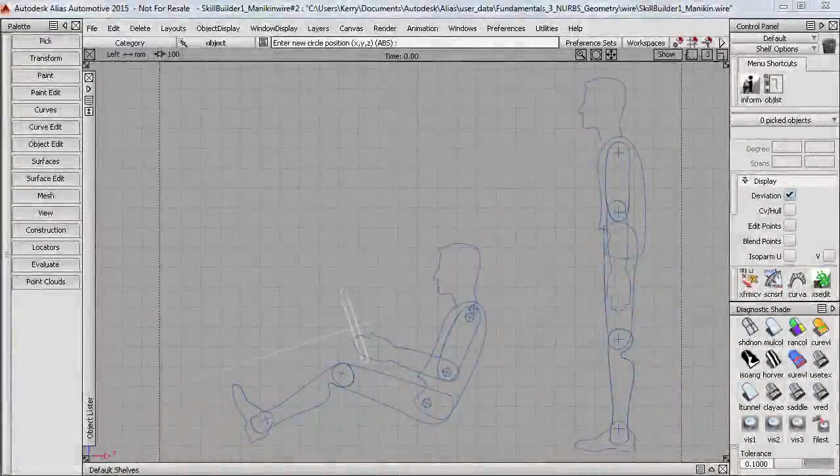This Skill Builder project gets you to create a basic mannequin model from multi-span curves, which can then be posed to help in future design projects. And I've just given you this sketch of the final assembly, and then also these reference parts, which are just on a layer which I've got set to reference, which means I can snap to the reference curves if I want to.

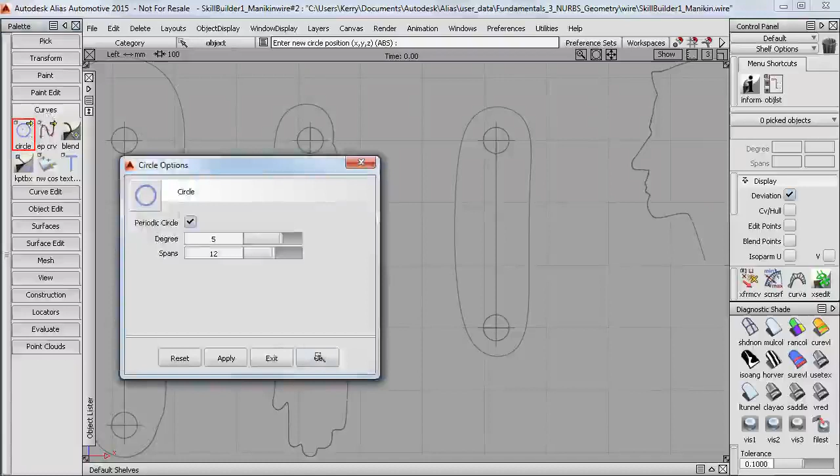Now I'll start with this upper arm, and I'll use a circle, and I'll keep it as a periodic circle. And then I can just scale it roughly to size, and then pick CVs and start to move them. And you can see the benefit of the periodic circle, which stays closed and smooth as I sculpt the CVs. Now I can always change the number of CVs in the control panel by changing the number of spans. And you often find that you need fewer CVs than you think to achieve a shape.

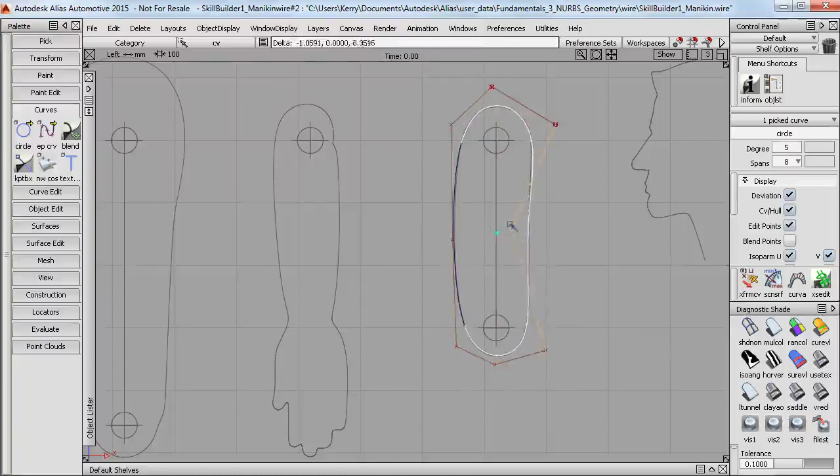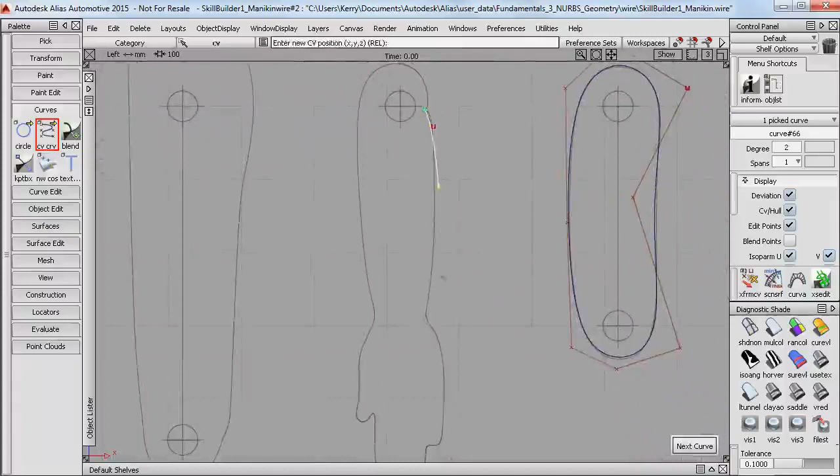Now, over here on the lower arm, there's a sharp point. And there's also a lot of intricate shapes. So for this, I'm going to use a CV creation curve. And I'm going to set it to degree 3, as this will help to hold the fine detail. And then I'll start at the sharp point and approximately trace around the shape. And as I'm doing this, I'm thinking more about the distribution of the CVs than I am about the exact position. And I'm trying to get more in the tight curves and fewer in the gentler curves.

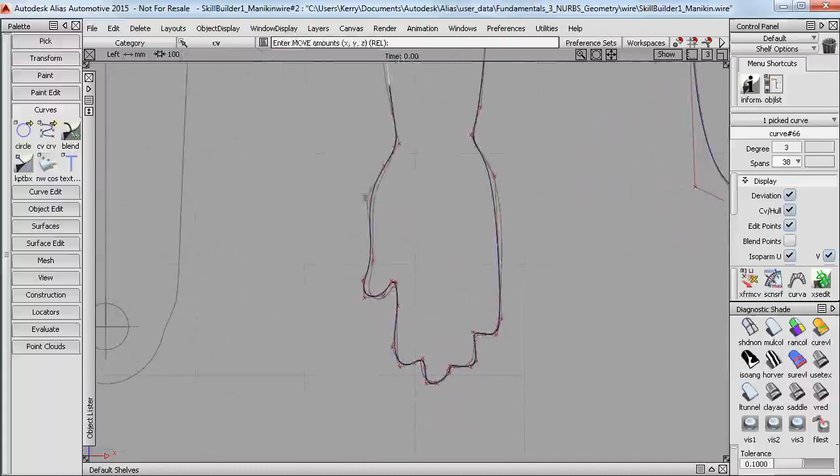Because all I can do at the start is just guess the CV positions as I place them, and then go back and start to move them around until I get the shape I want. And you do get better at guessing with experience, but it's still always a process of discovery and refinement. So don't be surprised if it takes a while to get the right shape.

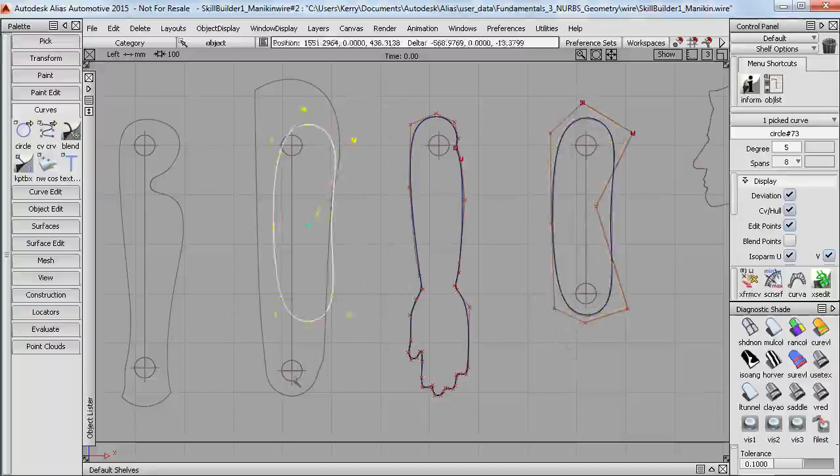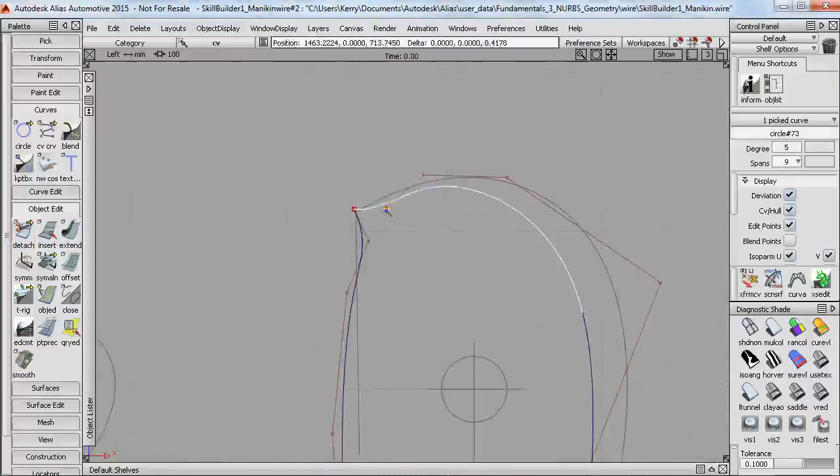Now for this large thigh shape, I can copy and paste the upper arm, move it over here, and then scale it roughly to size. But I've got a sharp point here too, and I can't create this from the periodic circle. So instead I can use the Detach tool under Object Edit, and then split the circle so that it becomes an open curve. And then I can just pick the CVs and create the sharp corner. And if I find that now I have too many CVs, I can just pick them and hit delete to remove them.

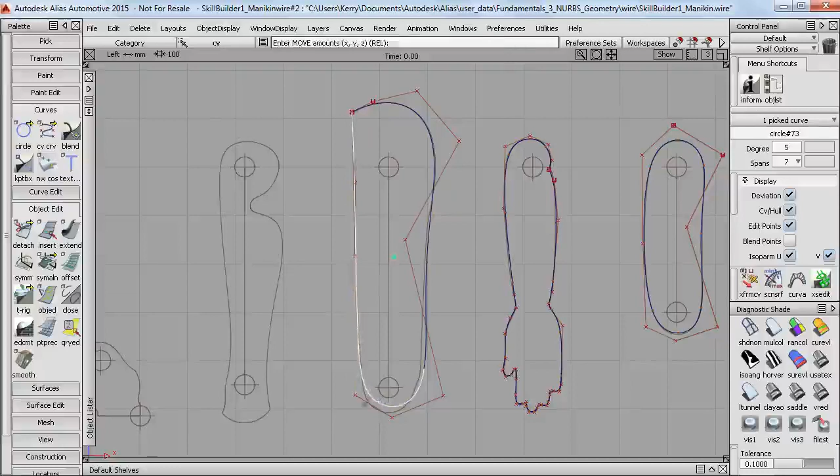So then I can continue to try and find the right shape. And the distribution of CVs is often just as important as the positioning. So I can bring these down to the bottom here to give me more control where there's a tighter curve. But I don't have enough CVs to create this small indent here. So to create extra CVs locally, I can use the Insert tool on Object Edit. And this adds in an extra edit point, which gives an extra CV too, and you can see the preview here in green.

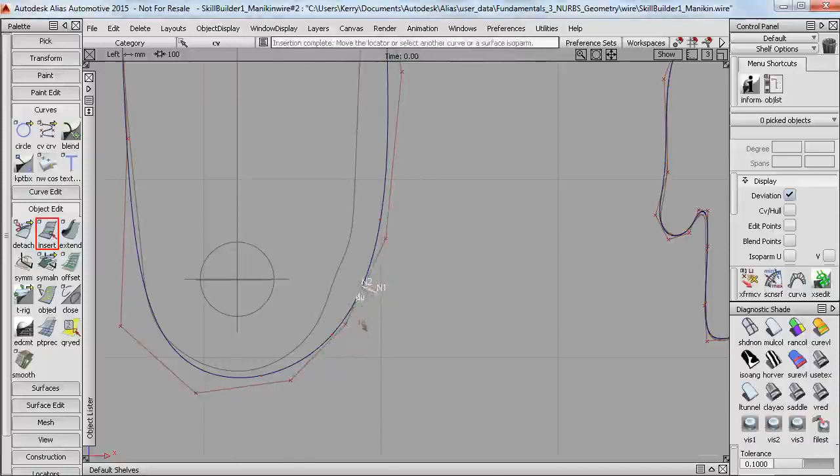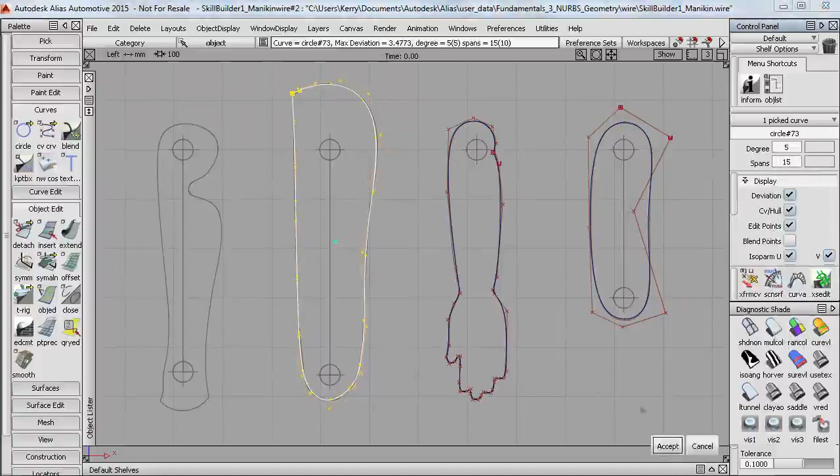So I'll hit Go, and I'll actually do Insert a couple more times as well. So that now I have extra CVs that I can use to create the indent. And you can see that the curve is a little bit lumpier now. And using Insert on these mannequin shapes is fine, but for our main car surfaces we try to avoid it, and instead increase the number of CVs using the Control Panel. And on the drop-down menu you can go up to 9 spans, but if you need more than that, just type in the number. So I'll stop here, but you can continue to finish off all the other components.

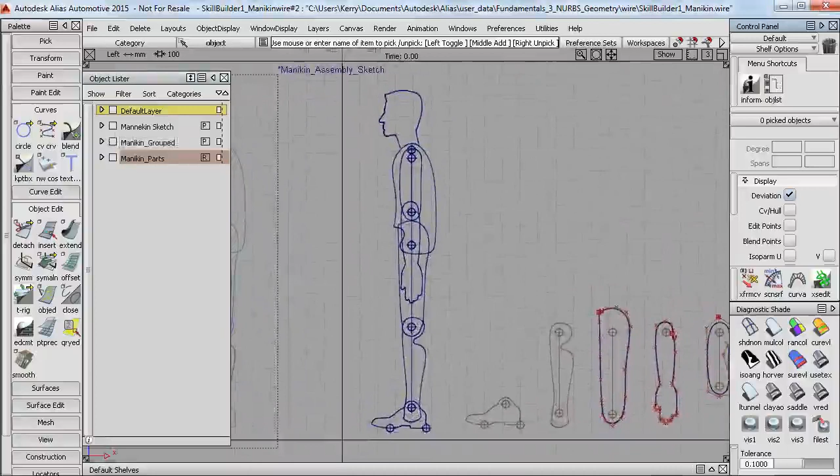So next, if you want, these can then be grouped and named and put together using the object lister. And I've provided an example for you here to show you what you're aiming for. So I'll just hide the other items and I'll turn off this layer. And if I open up the mannequin layer, you can see that the grouped mannequin contains the upper body and the leg. And these in turn have groups within them.

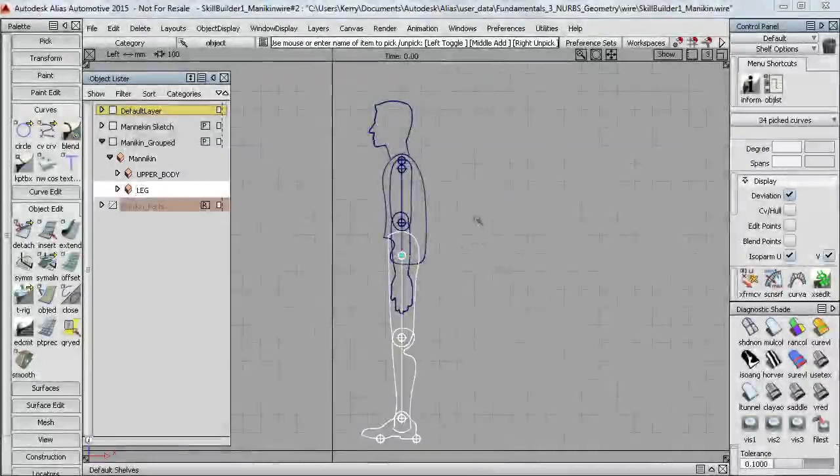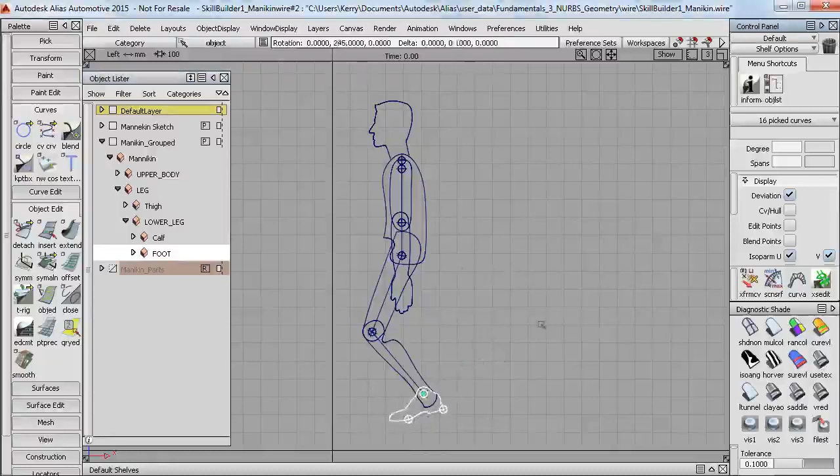So if I pick this leg, you can see that it has a pivot at the hip joint. And that's really important, so that when I rotate it, it works like a leg should. And then within the leg, I have a thigh, but I don't want to move that. So I'll just select the lower leg and rotate that. And then finally, I can choose the foot, which has got a pivot point on the ankle. Now, if I then want to put him in a sitting position, I can rotate the whole leg again.

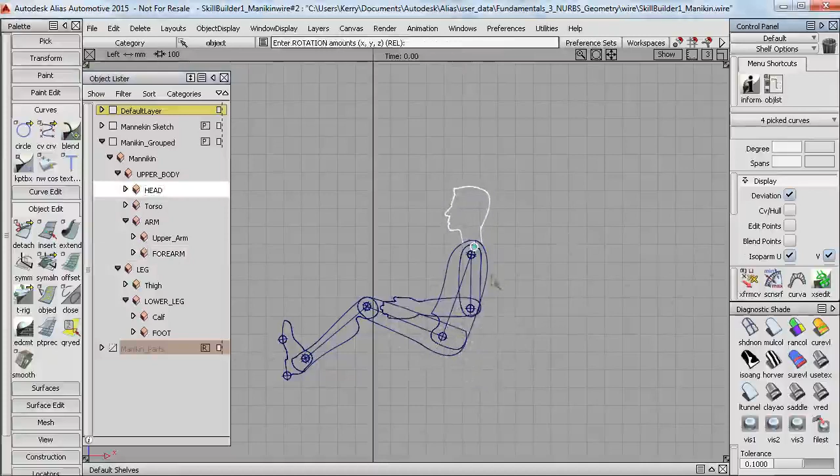And then finally I can choose the whole upper body and then recline that back. And if I open up the upper body node, I can get to the arm and rotate that, and the forearm. And finally, I can just tilt his head forward. So just use this as a way of practicing grouping, pivots, and naming nodes.

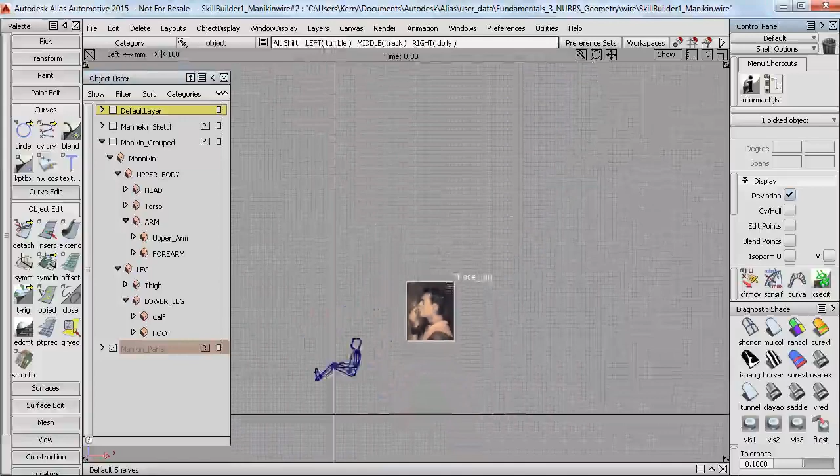And finally, just for fun, you can find an image and drag it into the view you're drawing in. And this is just a canvas image, so you can pick it and move it and scale it, and also use the transparency sliders to tone down the intensity. And then you can use that to create your own design for, in this case, the mannequin head. So for this Skill Builder project, the main task is to create the curves. But for an extra challenge, have a go at creating the grouped hierarchy as well.